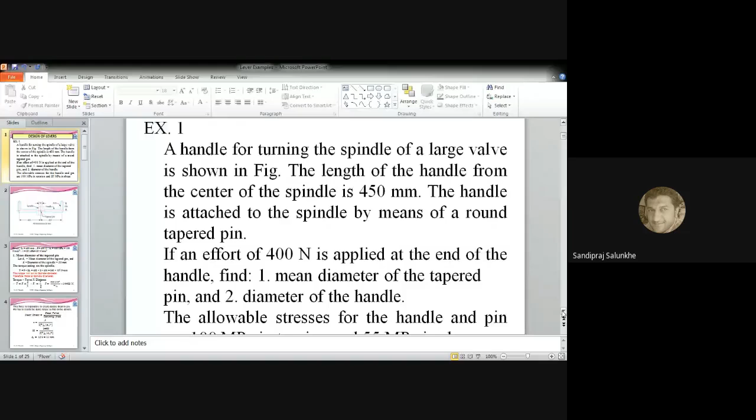Let's note down the problem statement. I'll read it once again. A handle for turning the spindle of a large valve is shown in the figure. I'll show the figure. The length of the handle from the center of the spindle is 450 millimeter. The handle is attached to the spindle by means of a round tapered pin, which we are going to design. If an effort of 400 Newton is applied at the end of the handle, find number one, the mean diameter of the taper pin, and number two, diameter of the handle. Allowable stresses for the handle and pin are 100 megapascal in tension and 55 megapascal in shear. Okay, this is the problem statement.

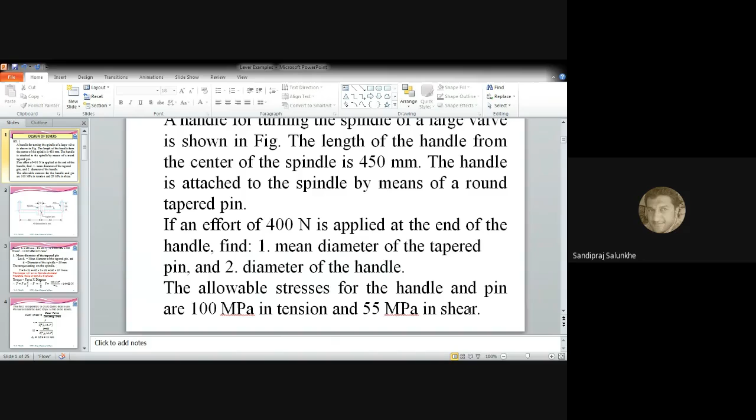Now when we look at the diagram of this handle, it is like this, where it has been shown that from the center, this distance is 450 millimeter, where we are going to apply force. Now just imagine that this lever is like a bell crank lever, where we are going to apply the force. But the force is applied from both sides. And in between, we are going to fix the spindle, where we are going to put the pin for attaching this handle with the spindle. That pin has to be designed, as well as the diameter of this handle we are going to calculate.

Okay, now we'll solve the problem. What is given is that length L of that lever is 450 millimeter from both sides. The effort applied P is 400 Newton. Allowable stress in tension is 100 megapascal, that is 100 Newton per millimeter square. Allowable shear stress is 55 megapascal, that is 55 Newton per millimeter square.

So from this data, we'll first calculate the mean diameter of the tapered pin which we are going to insert here. We have already discussed that this pin will undergo double shear, and we have to consider that pin in shear as well as in bending. So we'll consider that mean diameter of the taper pin is D suffix 1, that is D1, and D is the diameter of that spindle, which is given as 50 millimeter. Here you can see this is 50 millimeter diameter of that spindle. So small d is the diameter of that spindle.

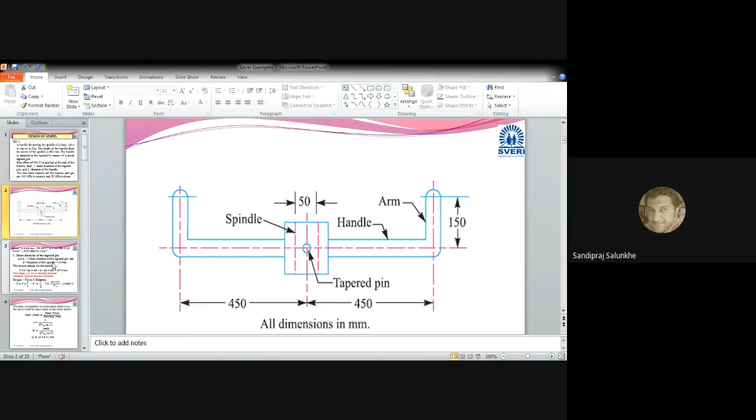Now first of all, we have to calculate how much torque will act on that spindle. Torque is nothing but if we apply force here, then force multiplied by distance, that will be torque. And as we are applying this force from both sides, we multiply this length by 2 in the formula of torque. That is effort applied multiplied by length, multiplied by 2, that is equal to the torque. So 400 multiplied by 2 multiplied by distance of 450 millimeter. So we are getting that torque applied by the handle is 360 into 10 raised to 3 Newton millimeter.

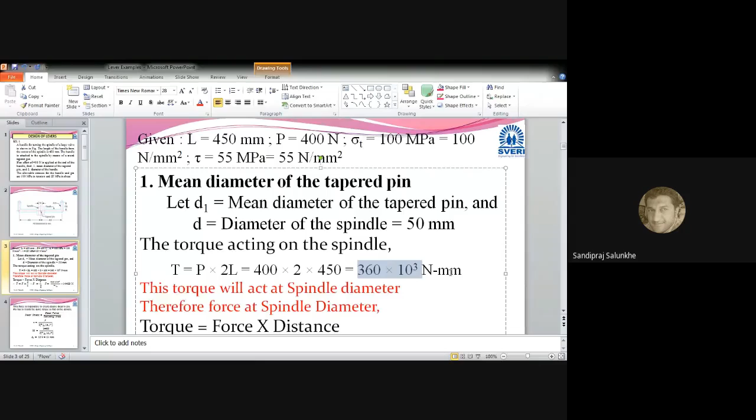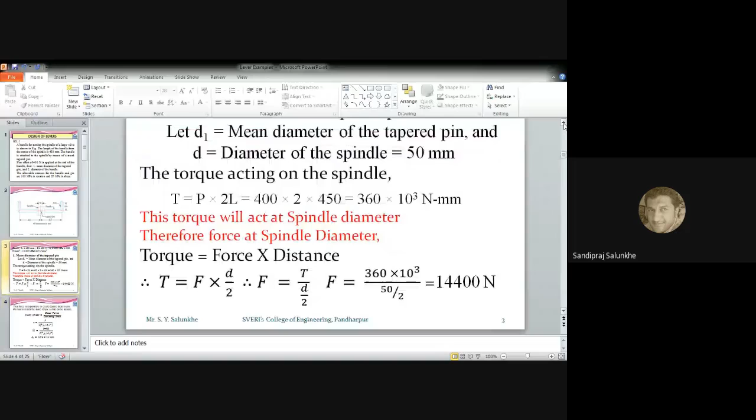Now this torque will act on the spindle, where we have to consider that same torque acting on the diameter of that spindle. When we calculate torque, it is equal to force multiplied by distance. Now here we are going to calculate... are you able to see this cursor? Hello? Yes sir, yes, yes sir. So this torque which is applied at the spindle diameter, here we are going to calculate now.

Because of the application of this torque, how much force will be generated? Torque we have already calculated. Now we are going to calculate that force which is generated at the spindle diameter. So we rewrite this formula as force equals torque divided by distance. Force is equal to the torque we calculated, divided by the distance at which that torque is applied, that is at the spindle diameter. So with respect to this center line, we calculate the force at this point. This distance is nothing but the diameter divided by 2, that is the radius of the spindle. So we take the radius of the spindle, and the force we get is 14,400 Newton. Now this force is responsible for creating shear in this pin, am I right?

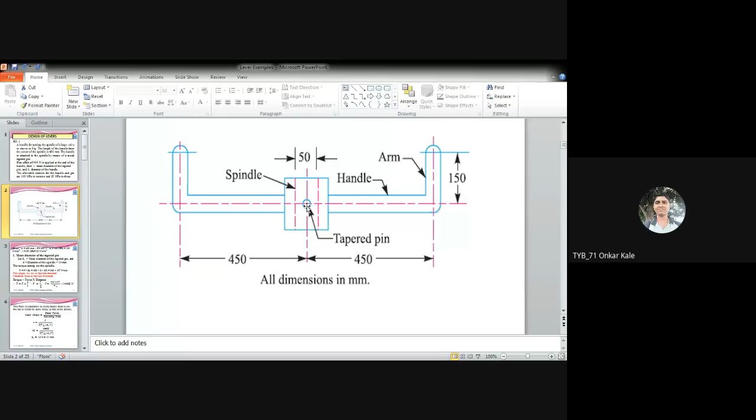Am I right? Are you getting it now or not? Hello? Not sir. Yes sir. Okay, I'll explain it. Hello sir. I'll repeat it once again. Okay.

लिव्हरच्या ह्या एंडला इथं कर्सर दिसतोय. ह्या कर्सरच्या ठिकाणी जर मी फोर्स लावला, इथं एक आणि ह्या साईडला एक. कारण ही लिव्हर फिरवताना एका हाताने नाही, दोन हाताने फिरवणार आहे आपण.

मग तिथे लावलेला फोर्स मल्टिप्लाइड बाय ह्या सेंटर पर्यंतचं डिस्टन्स, हा टॉर्क जनरेट होईल ह्या सेंटरवर. हे बरोबर आहे का? ठीक आहे, तो टॉर्क आपण कॅल्क्युलेट केलाय.

त्या फॉर्म्युल्यानं बरोबर आहे. आता हा जो टॉर्क अप्लाय केलेला आहे, हा टॉर्क ह्या स्पिंडलच्या डायमीटरवर किती फोर्स तयार करेल? कारण इथं तर आपण फोर्स अप्लाय करत नाही, फोर्स अप्लाय करतो इथं. त्याच्यामुळे जनरेट होणारा टॉर्क, ह्या सेंट्रल लाईन भोवतीचा टॉर्क, तोच टॉर्क इथं स्पिंडलवर पण अप्लाय होणार आहे. बरोबर आहे का? हा, यस सर, बरोबर आहे.

मग आता आपल्याला कॅल्क्युलेट करायचं आहे ह्या स्पिंडलच्या डायमीटरवर अप्लाय होणारा फोर्स. टॉर्क बरोबर काय? फोर्स मल्टिप्लाइड बाय डिस्टन्स आहे, जो ऑलरेडी आपण टॉर्क कॅल्क्युलेट केलेला आहे. टॉर्क इज इक्वल टू फोर्स मल्टिप्लाइड बाय डिस्टन्स.

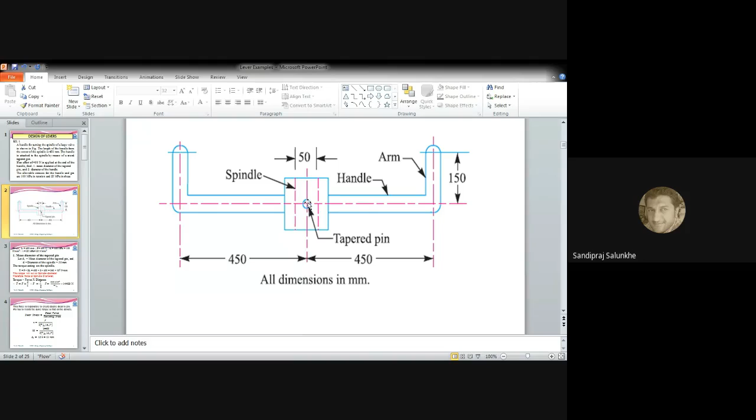यस सर. बर, मग आता जर पिन इन्सर्ट केली आणि हा टॉर्क जर अप्लाय केला तर ह्या पिनला शिअर आउट करेल तो. हा जो फोर्स आहे, म्हणजे ह्या पिनच्या शिअरला हा फोर्स रिस्पॉन्सिबल आहे. इथे बरोबर आहे? यस सर.

ओके, मग आपण म्हणू this force is responsible to create double shear in pin. So what is formula for calculating shear stress? Shear stress is equal to shear force divided by resisting area. Now how much force is responsible to create shear? That already we have calculated.

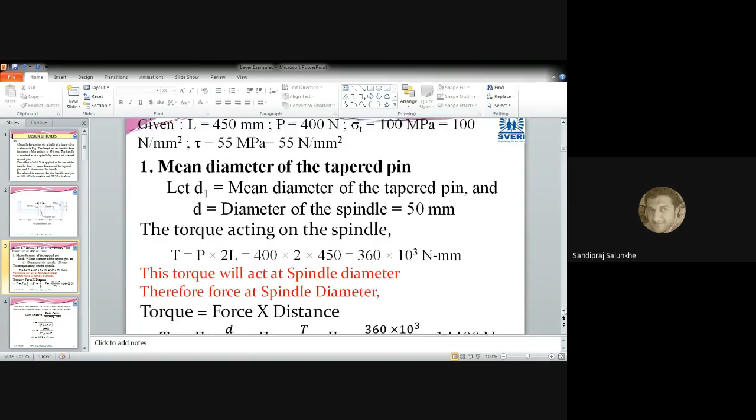हा फोर्स 14,400. बरोबर आहे? यस सर. So we'll put the value of force here and resisting area. आता पिन जे आहे त्या पिनचा रेजिस्टिंग एरिया किती असणार आहे? पिन आहे सर्क्युलर, शिअर साठी रेजिस्टिंग एरिया त्या पिनचा आहे π/4 पिनच्या डायमीटरचा स्क्वेअर, बरोबर आहे?

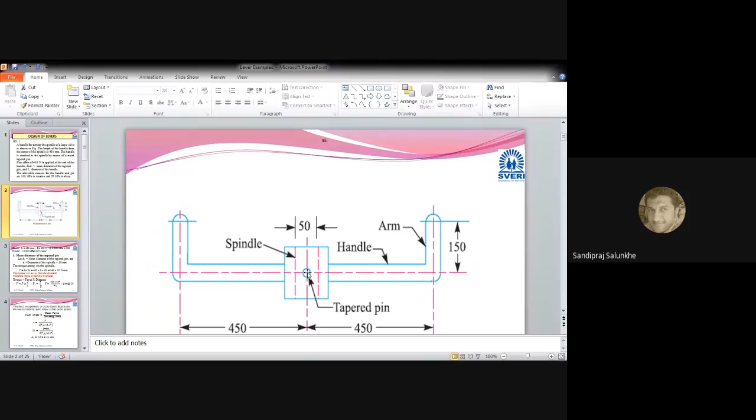Yes sir, येस, बट द शेअरिंग इज टेकिंग प्लेस ॲट 2 प्लेसेस. आता ही जी पिन इन्सर्ट केले ते त्या साईडनं बाहेर पण आले, बरोबर आहे? त्याच्यामुळं त्या साईडनं बाहेर येणाऱ्या पिनला तिथं पण तो फोर्स अप्लाय होणार आहे आणि ह्या साईडला पण अप्लाय होणार आहे. त्यामुळे डबल शिअर होणार आहे या पिनचं, जस्ट लाईक आपण नकल जॉईंट मध्ये बघितले तसं, बरोबर आहे? यस सर, ठीक आहे, त्यामुळे हा एरिया जो आहे तो मल्टिप्लाय केलाय 2 न.

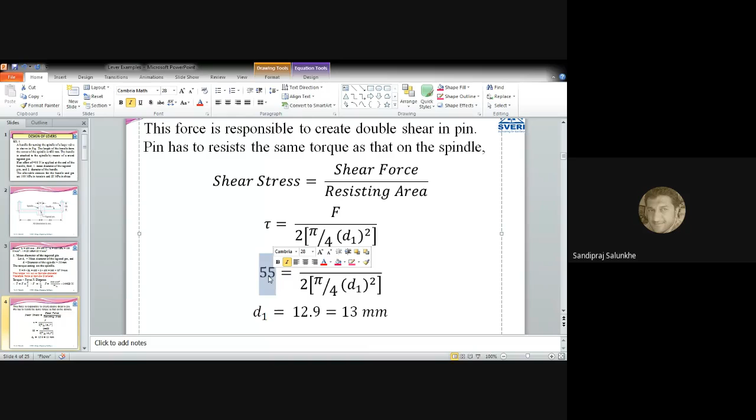डबल शिअर साठी, त्यामुळे शिअर स्ट्रेस इज इक्वल टू फोर्स डिवाइड बाय एरिया. नाउ हिअर वी आर नोईंग how much force is, that is 14,400 Newton. What is the shear stress value? It is 55 megapascal, that is 55 Newton per millimeter square. And 2 is known, pi is known, 4 is known.

Only unknown will be D1. So from this we can calculate D1 as the diameter of that pin. Am I right?

Yes sir. Okay, and that we have calculated as 13 millimeter. That is 12.9 millimeter, which has approximated to 13 millimeter. Right?

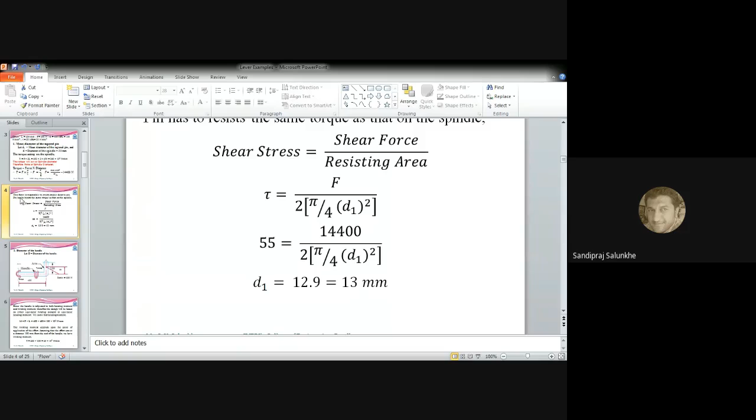Yes sir. Okay, now second thing we are going to consider, that is design of arm. Now diameter of handle we are going to calculate. Now see this figure carefully. We are going to consider that capital D is the diameter of this handle. ह्या हँडलचा डायमीटर जो आहे सगळीकडे सेमच आहे, तो आपण कॅपिटल डी कन्सिडर केला. ठीक आहे.

आता ह्या बेलक्रॅन्क टाइप किंवा रेक्टँग्युलर, इथं 90 डिग्री अँगल असलेल्या लिव्हरवर जर मी ह्या सेंटर पासून 100 मिलीमीटरवर विच वी आर गोइंग टू कन्सिडर. आता ह्या लिव्हरची लेंथ जी दिलेली आहे ती 150 मिलीमीटर. एक्झॅक्टली आपण टोकावर फोर्स अप्लाय करणार नाही, हात कुठेतरी धरणार आहे याच्यावर. त्यामुळं अप्रॉक्सिमेटली 100 मिलीमीटर अंतरावर हा फोर्स अप्लाय केला 400 न्यूटन. बरोबर आहे?

ओके. आता हा जर फोर्स अप्लाय केला तर तो काय करेल, एक तर टॉर्क जनरेट करेल, जो आपण ऑलरेडी कन्सिडर केला पिनच्या डिझाईनसाठी. त्याला आपण टॉर्क जनरेट करू म्हणून, हा टॉर्क. बरोबर आहे?

आणि हा ह्या सेंटरवर फोर्स अप्लाय केलेला नाही, त्याच्यापासून थोडा इसेंट्रिक आहे, तर त्याच्यामध्ये ट्विस्टिंग होईल का ह्या हँडल मध्ये? हा हँडल पिळला जाईल का? आर यू गेटिंग मी ऑर नॉट?

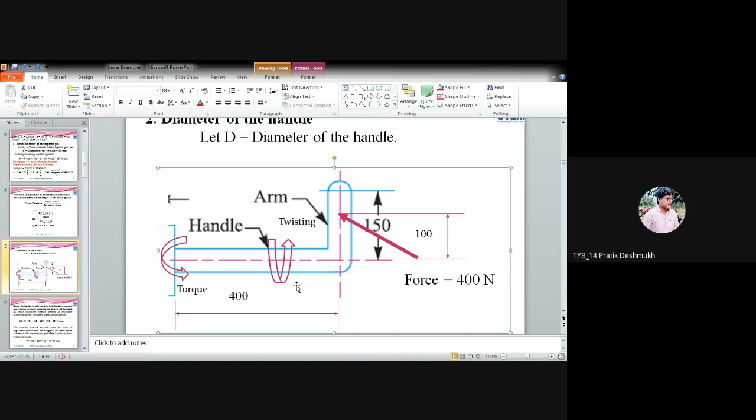हॅलो. हा येस सर. ठीक आहे.

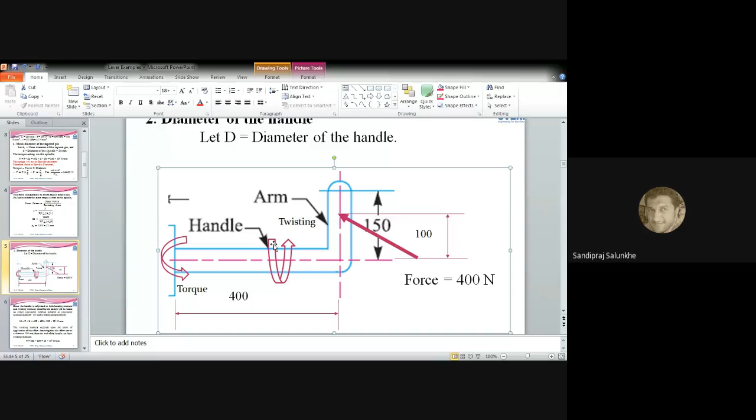मग आपल्याला आता ह्याचा दिस केस बिकम्स कंबाइंड स्ट्रेस, दॅट इज टॉर्शनल प्लस बेंडिंग moment will be generated here. Okay. That twisting, that is nothing but that again we are going to consider as a moment. Okay. So that's why we have to consider that two cases.

Here I have described the same. जे आता मी तुम्हाला फिगर मध्ये एक्सप्लेन केलं तेच इथे एक्सप्लेन केलंय. Since the handle is subjected to both bending moment and twisting moment, therefore the design will be based on either equivalent twisting moment or equivalent bending moment. Now when such situation occurs that twisting and bending is generated, then we have to consider equivalent twisting moment as well as equivalent bending moment also. And that how we are going to calculate it, that I will explain in the next slide. But we have to consider that twisting moment as well as bending moment too.

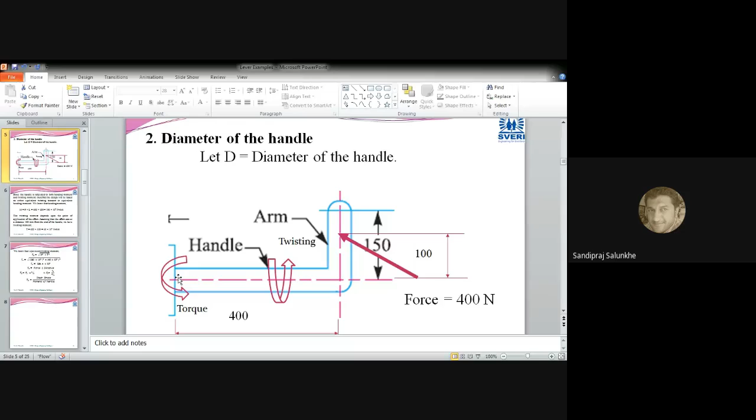Okay. So when we are going to consider that bending movement, first of all, bending moment is equal to force multiplied by distance. So it will generate the bending moment, that torque which is generated, that will create bending here. Okay. So that bending moment has calculated as P into L, and that is equal to 400 multiplied by 450 distance, and that is equal to 180 into 10 raised to 3 Newton millimeter. That is the bending moment which is generated.

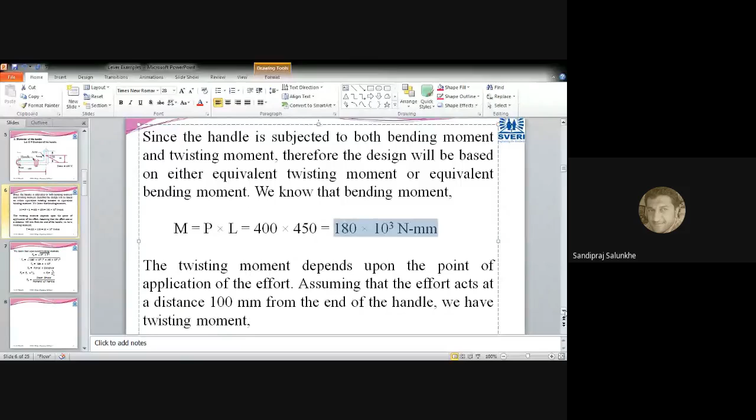Okay. Now how much twisting moment will be generated? That twisting is because of the force which is applied at 100 millimeter eccentric. And that's why this twisting moment, that will be equal to 400 multiplied by 100. 400 is the force and 100 is the distance. And that is equal to 40 into 10 raised to 3 Newton millimeter. That is the twisting moment which is generated.

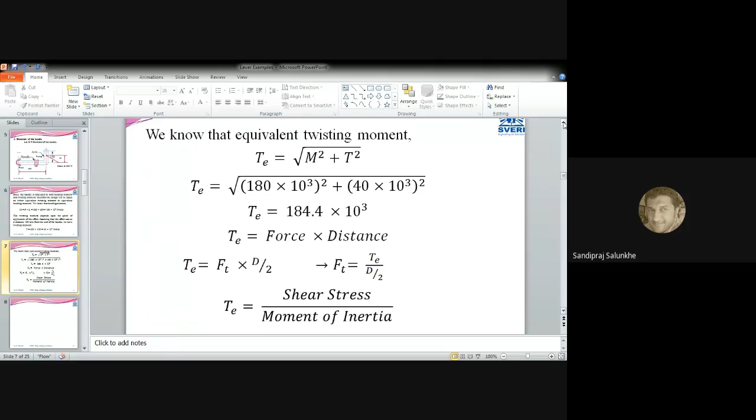Now based on this, we are going to calculate equivalent twisting moment. And we'll call it T suffix E, that is equivalent twisting moment. Okay. And that is equal to under root of bending moment square plus twisting moment square. I think this you might have learned in AME subject. That is when any component is subjected to combined stress, then we are going to calculate its equivalent either twisting or bending. Am I right?

हे समजलंय का? हॅलो. हा पार्ट झाला? Yes, sir. हा झालाय का पार्ट? एएमई मध्ये हा पार्ट झालाय का? इक्विव्हॅलंट बेंडिंग आणि इक्विव्हॅलंट ट्विस्टिंग मुवमेंट कॅल्क्युलेट करायचा. Hello.

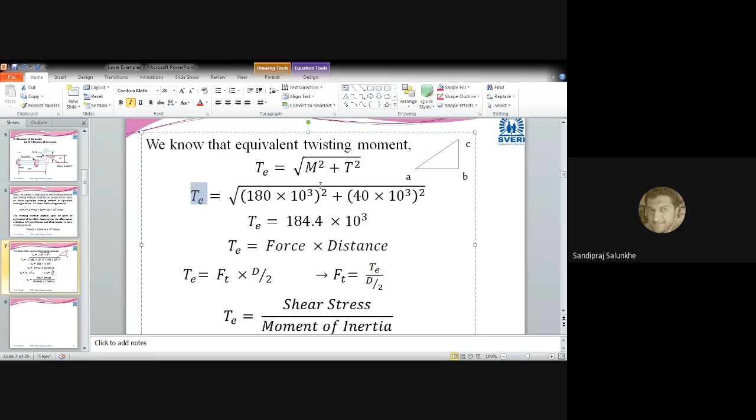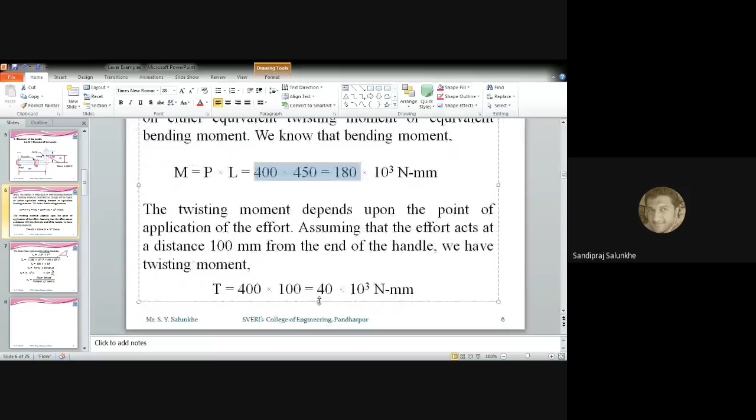Hello, yes sir, okay. So this equivalent twisting moment which we have calculated, M, already we have calculated bending moment multiplied, bending moment square plus twisting moment square. Here we have calculated this bending moment which is equal to 180 into 10 raised to 3, and twisting moment which we have calculated is 40 into 10 raised to 3. So equivalent twisting moment we have calculated as 184.4 into 10 raised to 3.

Theek hai, this twisting moment, that is nothing but torque. Torque aapan kasa calculate karto? Force multiplied by distance. Ok, aata hya force multiplied by distance madhye aapla torque mahit aahe. This torque which we have calculated here, force we have to calculate.

Twisting la responsible asleley force we have to calculate, okay, into distance d by 2. So when we are going to calculate its force, this force is equal to equivalent twisting moment divided by d by 2. Okay, now this twisting moment which we are going to calculate - we have calculated force here, and here we are going to write the formula which you have learned.

Are you remembering that in case of bending we are going to consider it as M by I is equal to F by Y is equal to E by R. Like in case of twisting or torque, are you remembering any formula by means of which we can calculate stress?

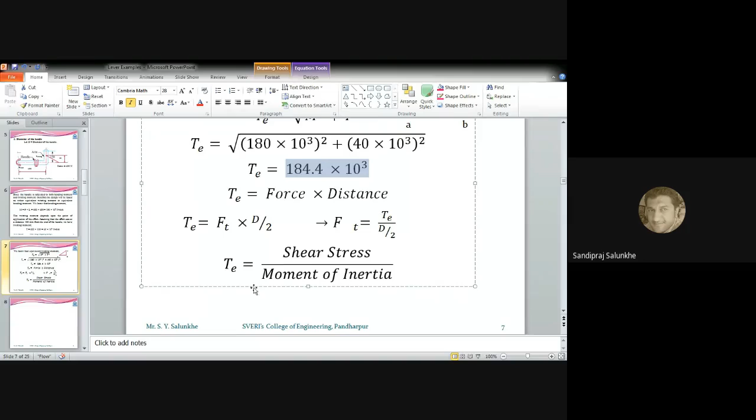What formula should we write here? T by J is equal to tau by R.

So what is T here? What is T for us here? 184.4 into 10 raised to 3.

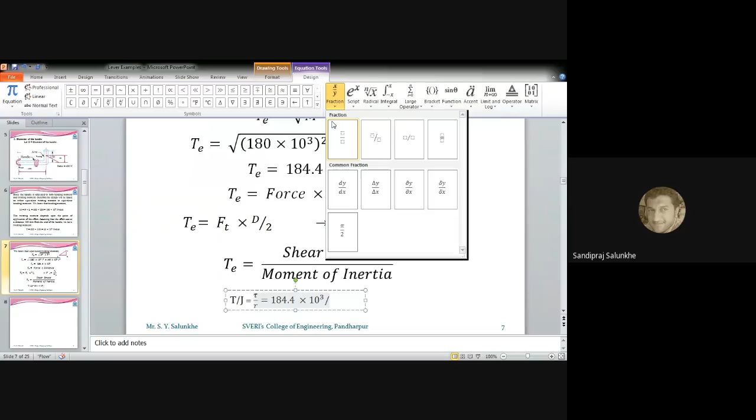Okay, that we have calculated as T divided by J. What will J be? Pi by 32 into D raised to 4.

That's correct, and is equal to... what will be with this? Tau divided by R.

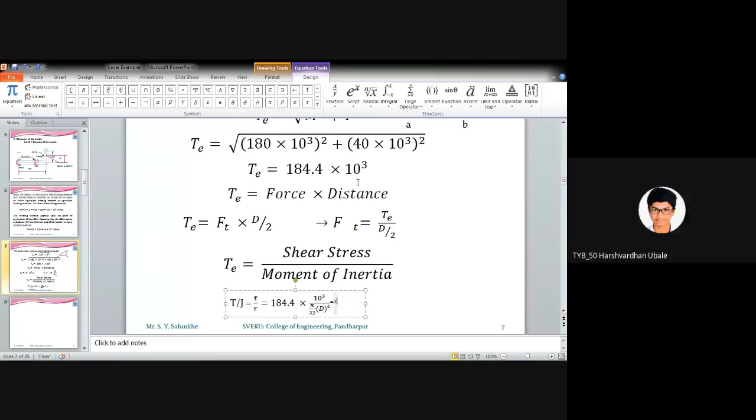Now we have to calculate tau is equal to... tau is 55, tau divided by R. R is how much? D by 2, correct.

Now this is D raised to 4, this is D by 2, can we write this equation in terms of tau. Tau is 55, now put the value of 55 here. Do you see what I'm doing?

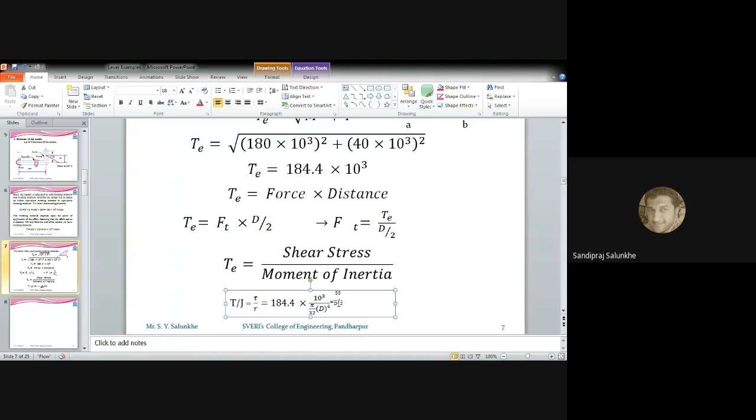So calculate this D in terms of all this equation. Now what is equal to D, you do the calculation and tell me the value of D.

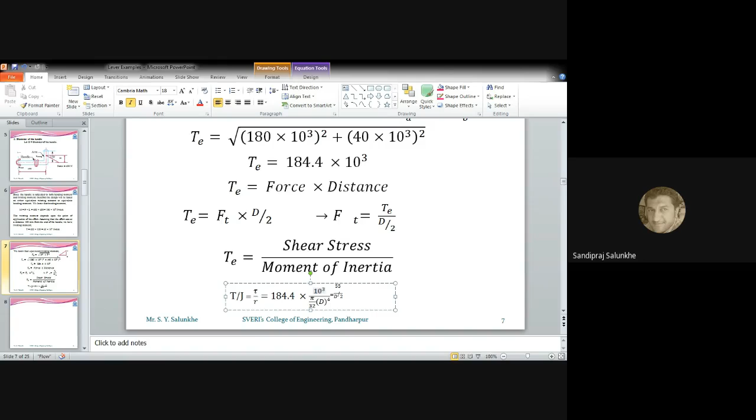Hello? Is it feasible?

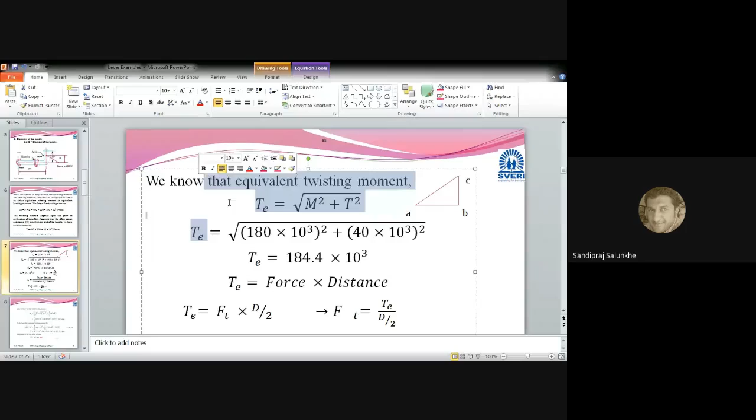Yes sir, yes. So already when we are going to calculate equivalent twisting moment which we have calculated, likewise equivalent bending moment also be possible.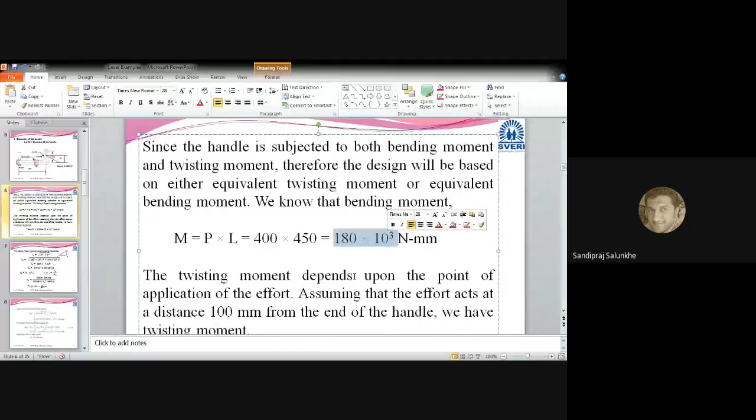So M already we have calculated and that is equal to 180 into 10 raised to 3. TE already we have calculated and that is equal to 184.4 into 10 raised to 3. So 180 into 10 raised to 3 plus 184.4 into 10 raised to 3, divided by 2. And equivalent bending moment is coming as 182.2 into 10 raised to 3.

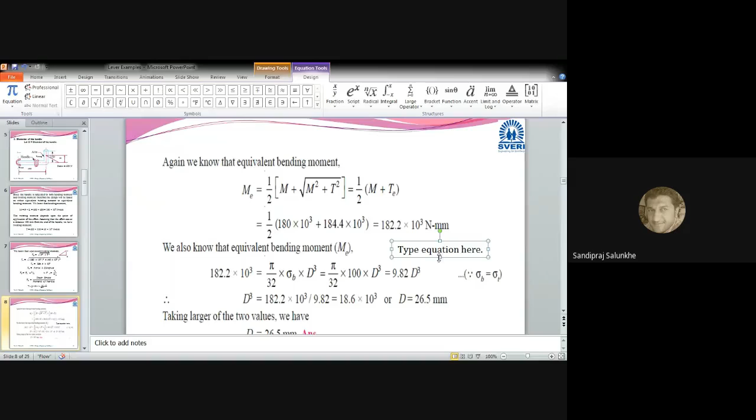Okay, here you remember only that formula. So from that we are going to put the value. Now here we are going to write the equation as. कोण सांगू शकेल मला? Can you write that equation? Equation editor, I will write here that equation. काय इक्वेशन फॉर बेंडिंग मूवमेंट? M by I is equal to

M by I is equal to Sigma B by Y. So sigma B by Y. Y काय लिहू शकतो आपण इथं?

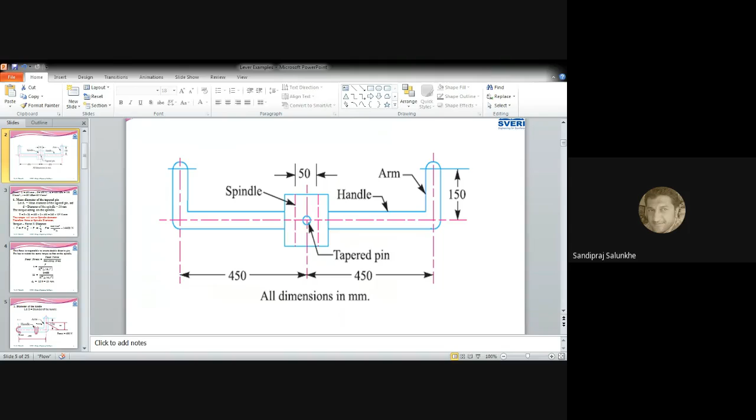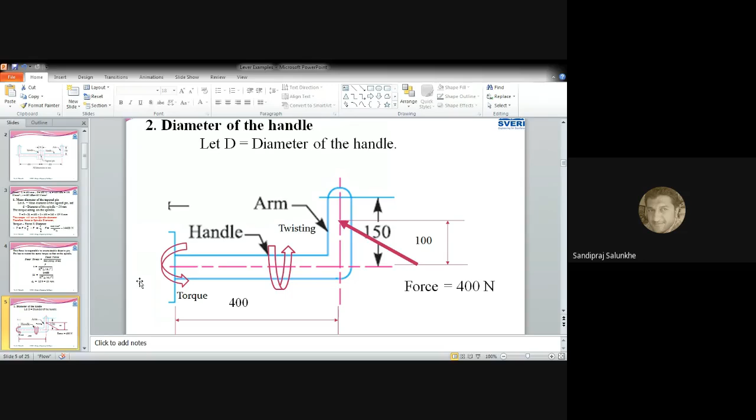त्या लिव्हर साठी व्हॉट विल बी द व्हॅल्यू ऑफ Y if this is the diameter? या बीम साठी हा जर 50 is the diameter, what will be the Y value of Y? D by 2, sir. D by 2. बरोबर आहे. D by 2, sir. Yes. So here we have to write D by 2.

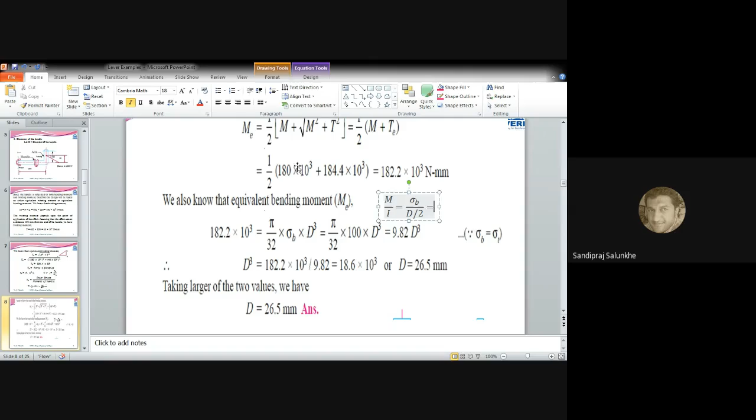Now put the values is equal to what M we have calculated. M is nothing but ME here. Don't be get confused in that. I will write here M suffix e, that is equivalent bending moment. So here what equation we can write? M which we have calculated, it is 182.2 into 10 raised to 3, divided by I is equal to

I किती आहे? What is formula for I for circular section? Hello? For circular section, what I is equal to? Pi by 64 into D raised to 4. D here, we have to consider capital D, that is the diameter of that lever, D raised to 4.

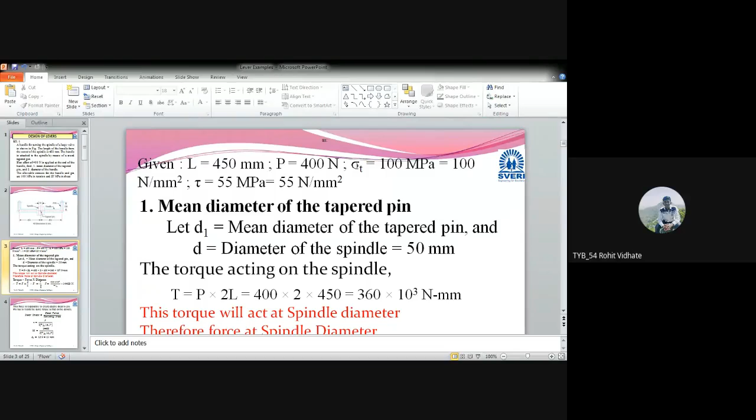What is value of sigma B? From given data, what value of sigma B we can take? Bending stress is equal to, दिले का याच्यात फॉर्म्युल्यात or in problem statement, whether it has given? 100 sir. Sigma T ची व्हॅल्यू दिली, दिसते? आणि बेंडिंग स्ट्रेस इज नथिंग बट आयदर टेन्शन or compression. बरोबर आहे? So value of sigma B is equal to sigma T.

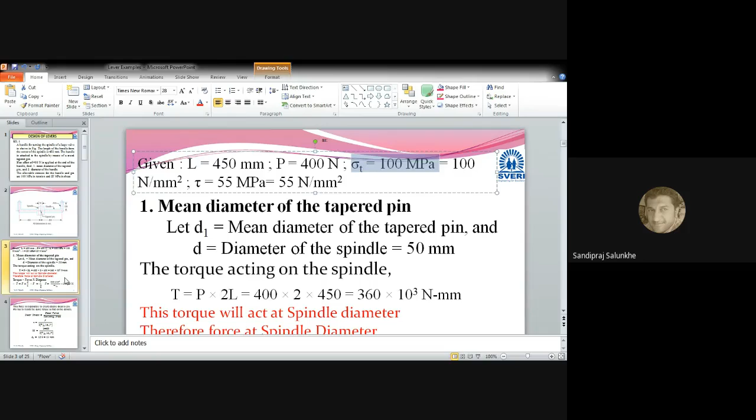पुट करा आणि D ची व्हॅल्यू काढा. What value of D you are getting? या फॉर्म्युल्यामध्ये व्हॅल्यू पुट करा. That is sigma B is equal to sigma T. By considering that value, we are going to get D is equal to. किती येते तुम्ही कॅल्क्युलेट करून सांगा, हे चुकलं ऍक्च्युली.

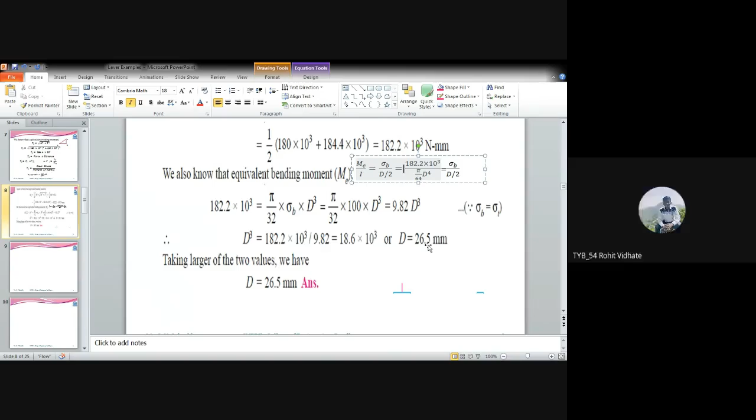हॅलो. 6.41 sir. किती? हॅलो. 26.47. 47 बरोबर. अजून कुणाची काय व्हॅल्यू आली? Same, sir. Same. Okay. Then we'll consider it as a 26.5 millimeter.

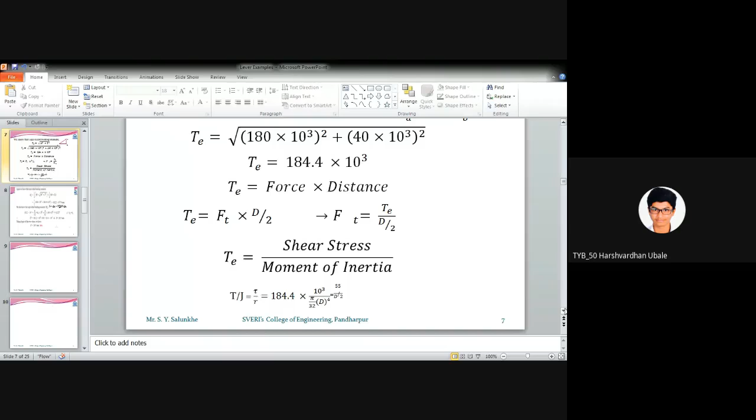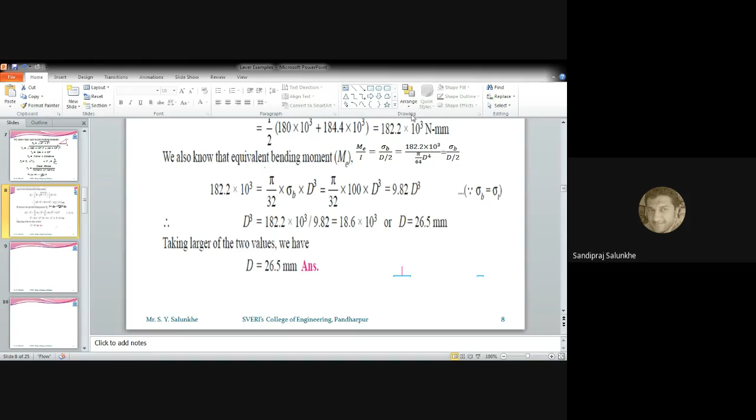So which value is preferable? Either it is calculated from equivalent twisting moment, which you have calculated equal to. किती calculate केले तुम्ही? 25.7. 26 sir. 26 consider केले, right? And this value we are getting as a 26.5. Which value is preferable? Approximately 27 millimeter. Sir, this one 26.5. Highest value, that is 27 millimeter.

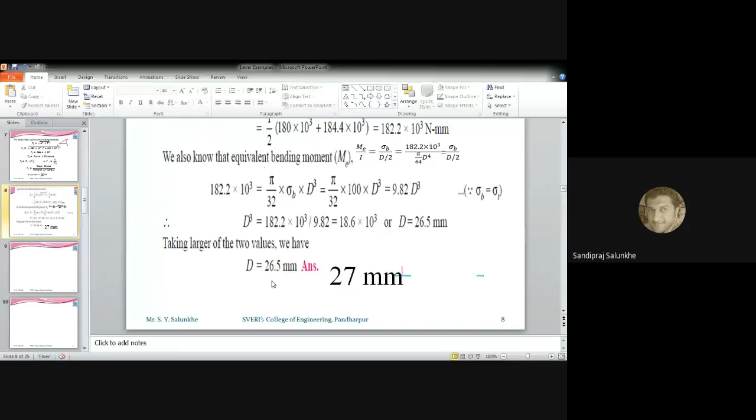आता हे गणित समजलेलं नाही असं अजून आहे का? So answer is 27 millimeter. That is the diameter of that lever. गणित संपले. कोणाला शंका आहे का? हॅलो. Yes sir. हा, शंका आहे का कोणाला?